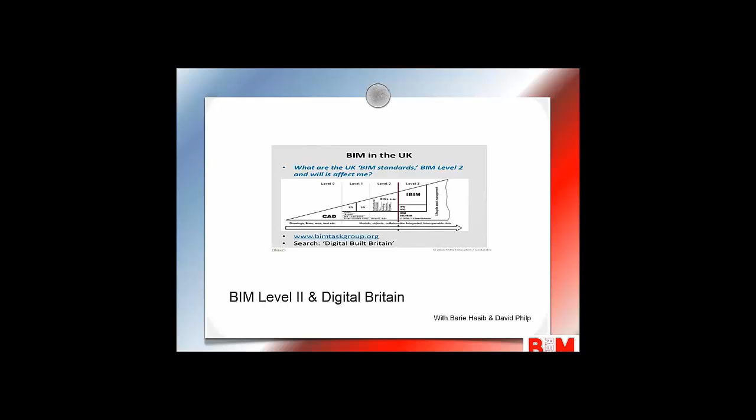What you're going to take away from today's session? Well, today's session you will discover exactly what the mandate actually means. You will learn the exact requirements you need to meet for BIM Level 2 projects. You will discover the lessons learnt so far and where next in the journey for Digital Britain.

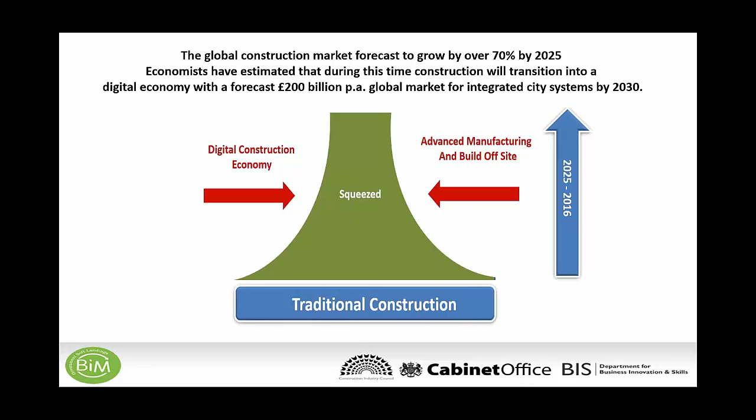So you can see that real imperative in the drivers. We've got to start to think about how we can change industry and help upskill towards that digital program environment. So that shift towards Industry 4.0.

So what are the drivers been for BIM still out there as we head towards April? Well, as we know, we've got mandates out there. We've got HM government in terms of level 2 BIM by April 4th, 2016. And up in Scotland, there's about 400 days to go as well, still targeting level 2 BIM.

In the private sector, we're seeing it being a key part of ITT requirements and requests for procurement. Another thing as well, I think it's fair to say we're seeing it more and more as part of actually, we need data for our operational data requirements as well.

So we're seeing a clear pull from clients, but equally, we're seeing that push as well in terms of the supply chain, thinking about how we can actually use BIM and digitization to offer innovation and work winning. I think there's still a need, despite the rise in terms of the economy, for better efficiency in the supply chain, underpinned by better productivity.

And I think that's a key thing that BIM Level 2 has been. It's certainly helped drive and enable better productivity at all stages. And the big thing is helping organisations give competitive advantage, that added value.

Conversely, in terms of pain gain, it's taking away that de-risking as well. It's helping de-risk and taking away a lot of pain. We're able to visualise and understand the pain points a lot more better, especially during operational stages as well.

And I think it's fair to say to us, as we head into 2016, it's kind of expected of us. We now live in a modern industry. This is what we should be doing anyways by default. Get to that point where we've reached a tipping point, and actually do we need the clients to actually stimulate what we're doing as well.

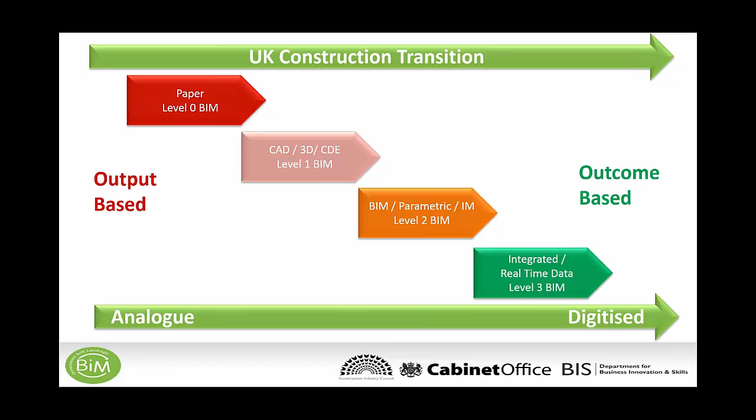So we're on a great journey from analog to digitization, and a move from being output-based to thinking more about outcome. As we start to think into that level 3 space, we're thinking more about outcome-based contracts - take the jet engine, power by the hour. We can start to think about how we use real-time data and performance data for outcomes and construction as a service.

At the same time, we're stripping out all this process waste as well. I think that's been a big part of the journey - starting a great conversation with industry about becoming more lean and stripping out the waste that's been inherent in what we do.

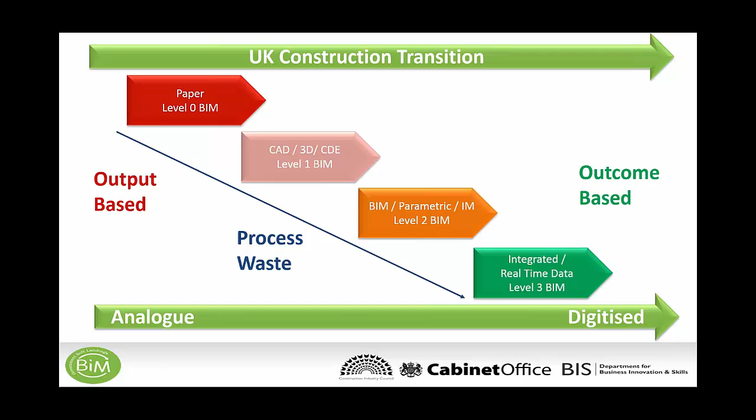We saw some great journeys as well - this is the Environment Agency's journey. If we overlay where they've come from: back in 2011, injecting the BIM protocol into their appointments, making sure they've got the base of a common data environment, putting in the employer's information requirements, then starting to think about information delivery plans, execution plans, master information, and that model production and delivery table.

As we head towards 2016, their focus is on COBie and how that can be used for verification and validation - a real journey from level 1 to level 2. You can see the longer shift into the world of digital engineering, and heading up to 2025, starting to think about how we move progressively into level 3.

At level 2 you can see their target of 20% in Capex, starting to unlock more digital efficiencies and heading towards 33% Totex. So a really mature journey going through there, and starting to think more about integrated geospatial data and how that links to asset information as well.

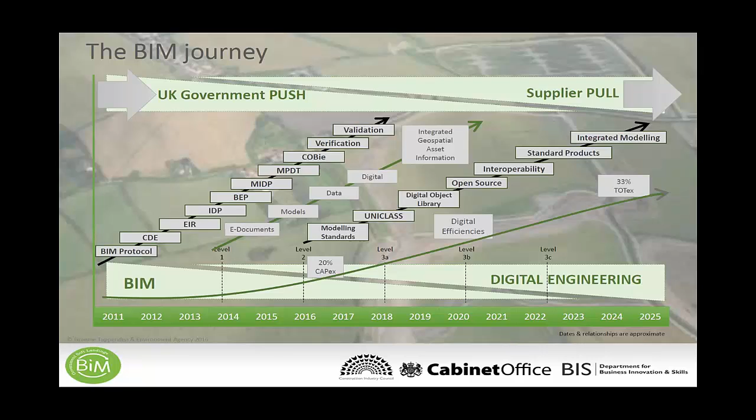We start off with PAS 1192 Part 5. That looks to put a holistic security wrapper, an appropriate one as well - a specification for security-minded BIM, especially around common data environment and smart asset management. So starting to think holistically and put a plan that's appropriate for the risk of that asset - PAS 1192 Part 5, the key document in level 2.

We then move in a layer and start to think about soft landings - British Standard 8536 - starting to think about how we brief with the end in mind.

So we're starting to think about bringing Capex and Opex up together, and we'll touch on this again in a minute, but soft landing. So the first two standards in level 2 are PAS 1192 Part 5 and BS 8536.

We can then start to imagine the value realization. Then we come into the next document in our suite, the information exchange method, in our case COBie, the Construction Operation Building Information Exchange, BS 1192 Part 4. And right at the heart of it, we have PAS 1192 Part 2, which looks at information management in the capital delivery phase, and we can swap that out for operational management with Part 3.

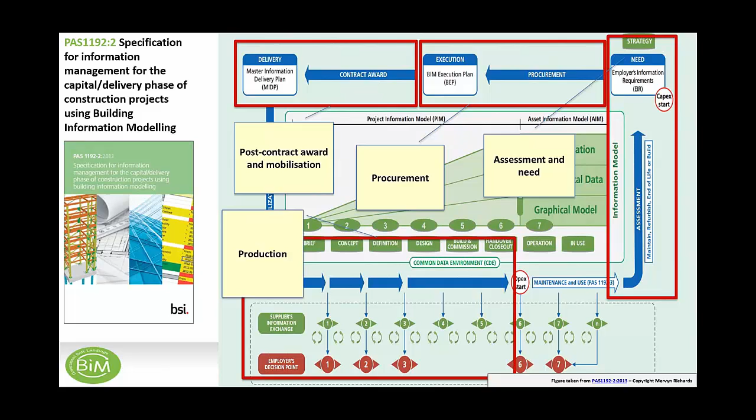We then start to build that project information model from both a design model and a construction model, all within the context of a common data environment. We've got a graphical model, non-graphical data, and linked documentation. And you can see we've got a series of what we call decision points and information exchanges that help support the decision making and the questions set out within the employer's information requirements, so we're producing data at an appropriate level of definition, and ultimately we can hand it across to our asset information model.

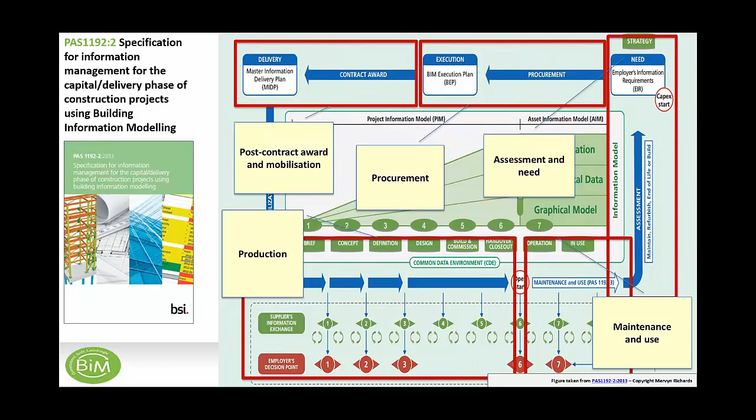Again, one of the things I'll signpost — there's a great series of videos undertaken by B1M that I think really bring these processes to life in a nice, simple way with much better graphics in mind. We also concentrate on, I think, two things — let's just focus on them.

PAS 1192-3, BS 8536, it's part of the Level 2 suite, and that encapsulates these soft landings and the need for someone to be at the very beginning to inform the employer's information requirements from an Opex point of view. We need to be able to test the model to answer, during the design stages, is it going to be fit for operation? Make sure we test it and start to think about post-occupancy evaluation.

People often say, where do we start as well? I think, for me, as well as PAS 1 and 2, Part 5 security, Part 3 is really, go back to that—we can never say it over enough—start with the end in mind. How information management exists within that context of asset management, ISO 55000, that should be the key starting point. And we've got to start to think about how we use and link these two suites of documents together.

So really, really important—just a bit of focus on BS 8536 and what that looks like in terms of Capex and Opex shaking hands. Thinking about total expenditure, we're thinking right at the beginning, smart briefing that draws past experience together, reviewing the targets that have been set in terms of social outcomes, economic outcomes, and indeed the environmental performance outcomes as well.

Moving to stage 2, using the models to regularly give reality checks—is it doing what it should be doing from an operational point of view? Is it going to give the outcomes that you want? We move over to stage 3, we're thinking about, from an Opex point of view, operational readiness, making sure we can test the model to ensure we've got a good handover. And again, starting to think about structured post-occupancy evaluation with documents, with surveys, and various KPIs that we can pull back to the start of the next one and establish actual outcomes and the lessons that were learned.

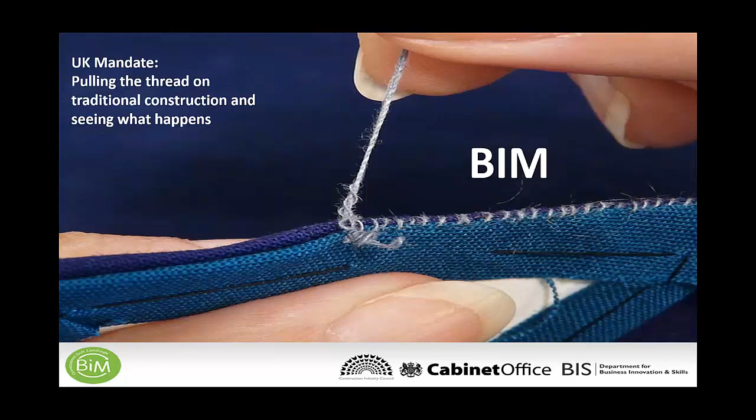I think one of the things that the UK mandate has done is kind of pulled the thread on traditional construction and seeing what's happened. And there's some good lessons out there—a few from Crossrail, and some great ones. Data is a valuable resource, it should be treated as such. We've got to think about it more and more, how we liberate the value of it, and make sure there's validation.

Make sure that you establish requirements, from the end user client right through the whole supply chain, and think about it at both business and project level, both enterprise and project. Structured data is really important. Take the time at the beginning, start with the end in mind, and think about classifications for work breakdown structure, asset breakdown structure, cost - if these can be aligned, that's really, really key. So spend some time structuring a data set with the end in mind.

Start to think more and more about keeping the models geometrically light, and think about the non-graphical data actually becoming more relational in nature. Become data-centric - data is at the heart of everything. Think more about digital documentation and how we use that digital data within the context of a common data environment. And be mindful of data interoperability - that's why we've got tools there such as COBie to help.

Avoid being led by IT. This should be very much information requirements led, a process thing. And I think if we've learned anything, people don't like change - this is our biggest thing. If anything, we've started a great discussion around behavioural change in the industry. So remember, this is about change management as much as it is about technology. BIM I think is a great thing just to bring people together in a collaborative nature.

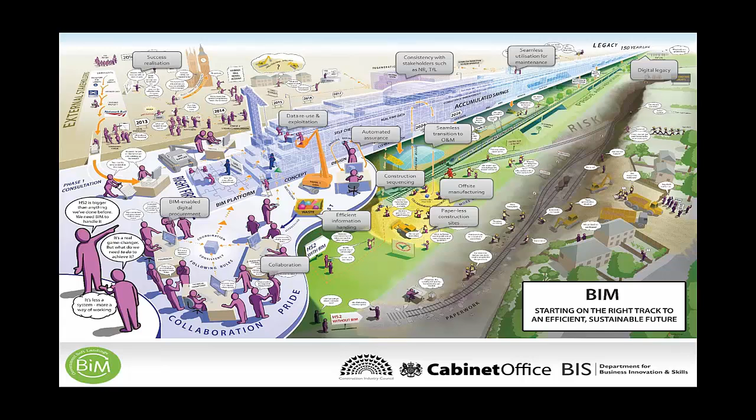A great quote from Andrew McNaughton: BIM is our lifeblood. It's our central nervous system for information management and decision making. So we're seeing these big projects there.

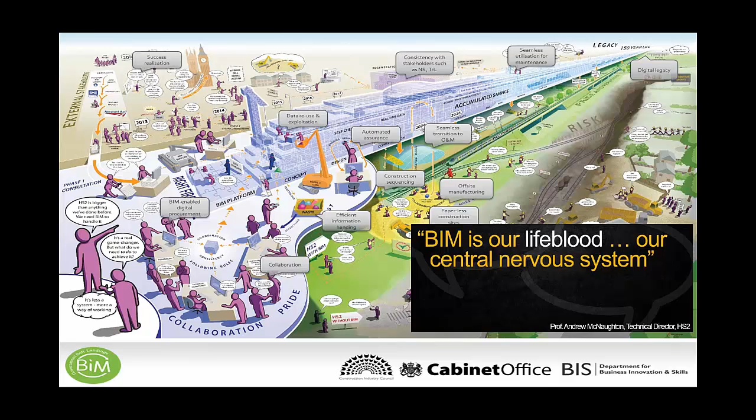And Crossrail, as it moves towards its journey in 2018, you can see what that means in terms of building two railways - the physical railway and the digital railway. Build better before you build - prototyping within there. Absolutely superb.

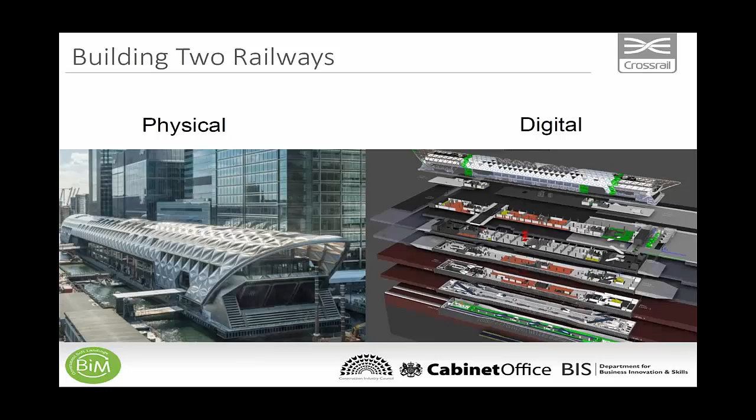And let's turn our focus to Europe as well. It's been a key part of the EU BIM task group. It's helping set up and establish the EU BIM working group, bringing together BIM at a national level to a common European approach, bringing together that digitised European public approach.

Some key figures for you, some good key statistics. 1.2 trillion, that's roughly the value of the construction sector across Europe, which equates to an average 9.9% of GDP. So huge value in terms of what construction does. 14.9 million people within the construction sector in Europe that we've got to move towards digitisation.

Roughly, we've got round about... I gave you some wrong figures there. We've got 95%, so we've got 3.1 million, 95% working in organisations of less than 20 people.

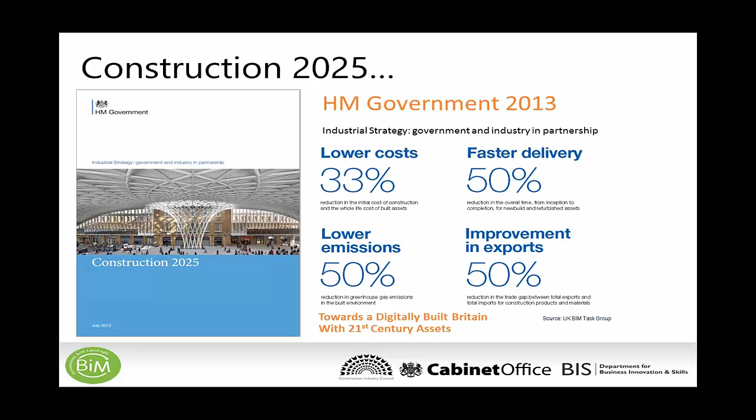So we're starting to think about performance management, starting to think about using big data, and this term starting to creep in now, dependency analytics, real-time data analytics that are being pulled in from data logs, telemetry, and other sensors. So we're starting to think about the Internet of Things on a construction and industrial scale.

We're also starting to think more and more about not just one singular asset, but we're starting to think about how buildings interact with transportation, water and utilities, and we can start to truly think about how it fits in with the smart city grid as well.

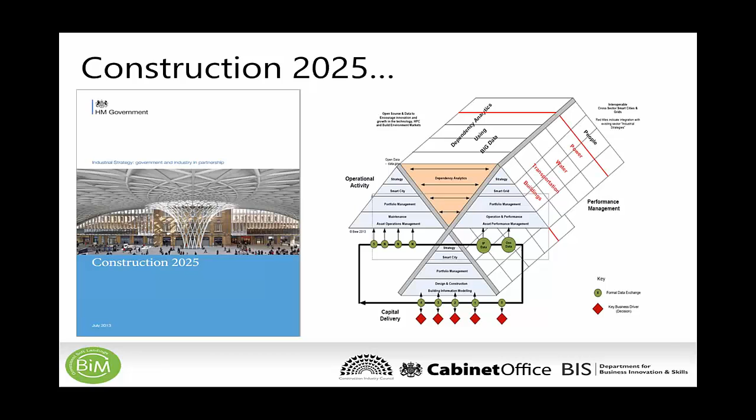And then you can see another layer there in terms of people. So we're starting to think about Level 3, collaboration to integration. And you can see there we're starting to think about Level 4 ultimately in terms of social outcomes in people. Just a different way of laying it out.

You can see our Level 2 is looked to in terms of better delivery and better management of the asset, in terms of better operate. Level 3, we're starting to think about operational business performance within there as well. So you can start to think about what this is going to look like when multiplied across portfolios, and that's the whole digital built Britain.

Ultimately, a shift to Level 4 in terms of better social outcomes as well. It might be in terms of healthcare, it might be judicial, but huge prizes as we continue up that ramp. And what we're seeing is Level 3 is starting to imagine new business models as well. We're starting to think about being able to deposit performance data, measure in-service performance, and compare it to brief.

So we can also start to think about new economic models that are outcome-based, a bit like your engine there, power by the hour. And we start to think more and more about social outcomes in terms of healthcare, it might be clinical performance. And if you're in a sensor-rich environment, we can start to think about feedback loops that actually give the ability to deliver long-term improvements in asset performance as well.

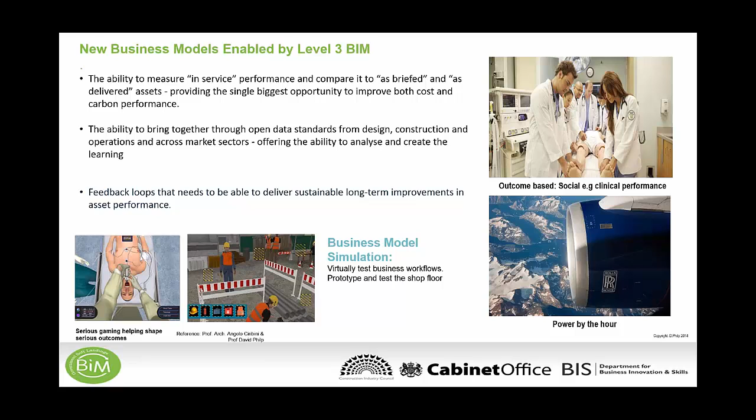A big thing we're seeing more and more is that linkage with gamification and business model simulation through level 3 environments, how we're using augmented reality and virtual reality. We can start to also prototype business models on the shop floor as well.

So that's a bit about a journey through where we are with the BIM task group at this moment in time as we head up to our key thing in terms of April the 4th, 2016, and indeed beyond. Go on to the website and have a look, and one of the things we'd signpost is we mentioned the BIM4 working groups. Please get involved, you can learn more from it, and find out more information that might be relevant to your sector. Download the standards, have a read of them, and find out what that means to you. So thank you for listening.

Fantastic, thank you David, thanks for the update. It's been very informative. Want to try to be respectful of time as much as possible. Had a ton of questions come in. Do you have 5 minutes? I know you've got to rush off to a meeting soon. I can give you 5, Barie, but only for easy ones. Fantastic. Oh, I don't know about this one then, actually.

How can a company be 100% sure to deliver BIM Level 2? And what happens if the company fails to meet the Level 2 mandate deadline? Well, it's a good question. So in the Level 2 project, it will be kick-started by the client. It will have, as part of the tender process, an employer's information requirement, setting out what information they will need should that party be successful. So the first thing you're going to do as that organisation is prepare your pre-contract BIM execution plan - this is my strategy to do it. At that moment in time there might not be full Level 2 ability, but it might say this is what we're going to do in terms of embedding standards, or it might even be support from other consultants or such like. And basically, when we talk about being compliant, it's the ability to deliver to that EIR, be able to supply the information that's set out within the employer's information requirement. And I think that's key.